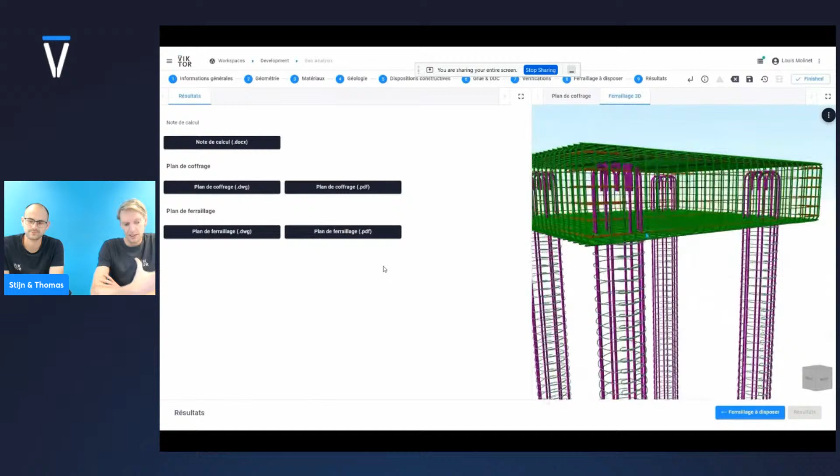To show what's possible, we have a nice example, this use case developed by Vinci, a French contractor. So you'll also see some French in the interface - that's also what we support, multiple languages. What you can see here is an app to design a foundation. It's a relatively simple structure, but the whole workflow is automated in one single application, with all the input parameters for both geotechnical and structural analysis.

All the drawings are automatically generated, and the reports are automatically generated based on all the input. Because of that, what normally would take weeks to design such a structure, they were able to bring back to - minutes is maybe a bit exaggerated, but under an hour they can now design such a structure.

Here you really see the power of a platform, that you can make an app where you can connect all these different calculations. I think the thing we're most proud of in this case is that this app was actually developed by an engineer - a structural engineer who developed this app, and he had almost no knowledge of Python when he started, but he was able to develop this app based on all the building blocks we provide.

All right, so that was the general introduction. I don't know if there are already any questions.

We see that there's someone from South Africa. Yes, Etienne, thank you for your comment. That's great. I think it's always nice if people let us know where you're from, so feel free to comment. In general, if you have any questions in between, just leave a comment, and we'll try to answer them as best as possible.

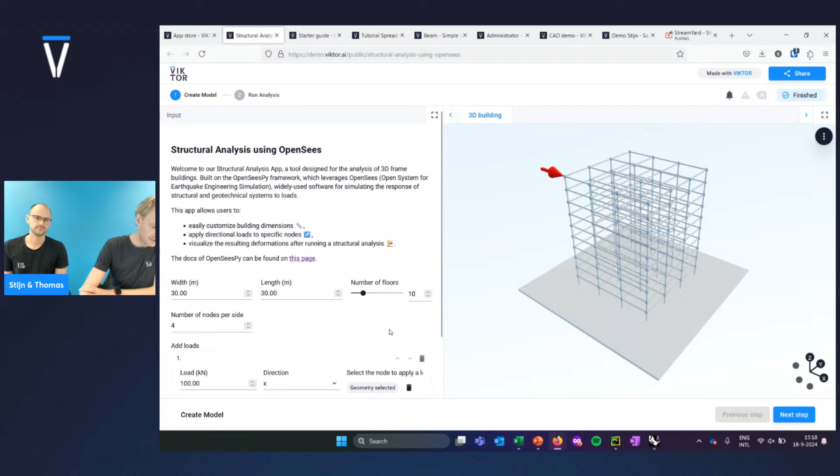To give an example, this is quite a nice app we recently added. What you can see here is that first you can just check out the app, so if you just open the demo, you see this app. This is quite nice to show, also because we added some new features which we presented last time. What you can do here is just have this parametric building, and then you can add some loads, for example.

So I can just click on this geometry, and let's say that I would like to add a load here as well. Maybe I would like to apply it in the Y direction.

And then in the next step, in this case, you can run - we use OpenSees, which is a Python package. So it's not connected to, let's say, a desktop finite element package, but just a Python package for structural analysis. And what you see here is this nicely deformed shape. So this is, you can see, quite a simple app.

So we really see this as a template that you can continue with. If you think this is an interesting app that you'd like to use, you just have a link to the repository, so all the code is just available. You can see here on our GitHub page we have all the code with which you can see how this app is set up.

In the app.py, usually most of the logic is available. And if you then select this template, you can create the app, and basically it immediately creates the app and loads it into your development workspace. Once you go through those steps, you can start adapting the app to your own needs - it's just a few clicks and then it's in your development workspace.

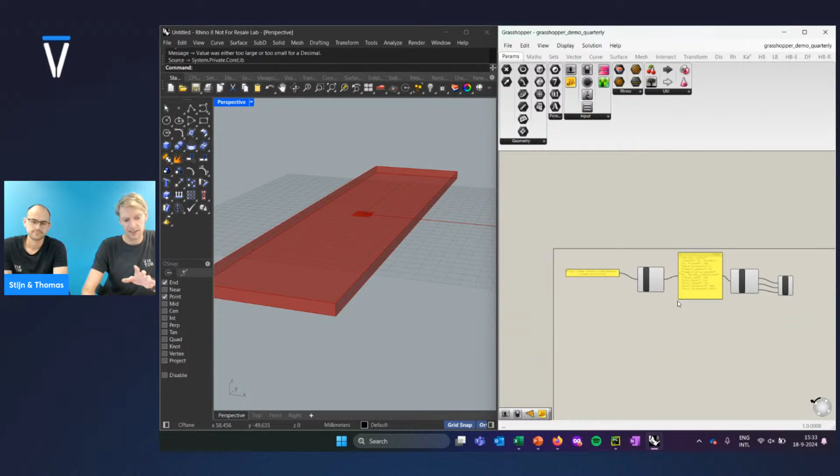However, what we also got questions about is, okay, what about the other way around? What about if from Grasshopper I actually want to call a VIKTOR app? Well, that's what you can see over here. And this is actually also using the API. Shortly, in a few weeks, we will post about this and explain it in more detail. But what you see over here is just a Grasshopper node that we have created.

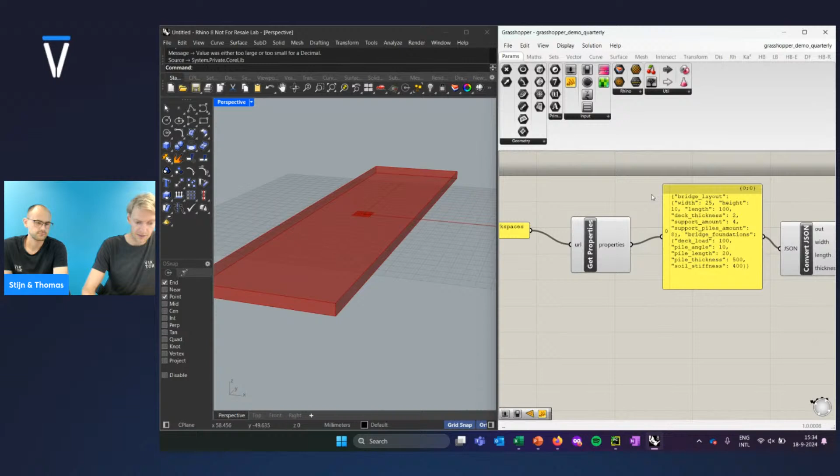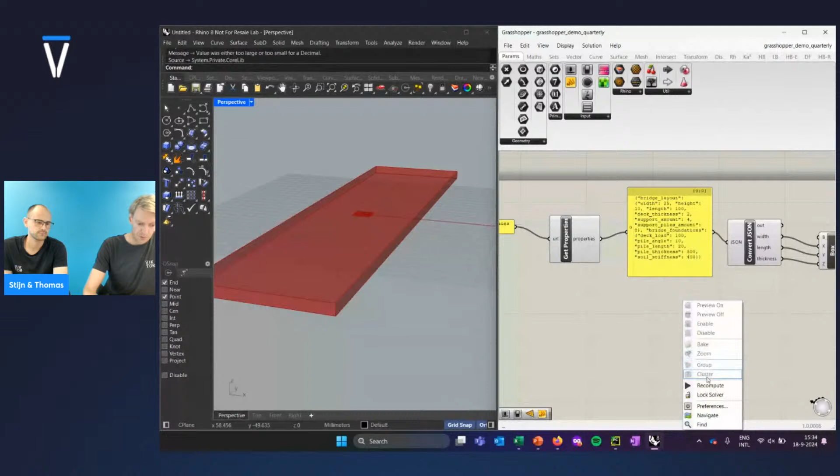In this case it's connected to a specific app, this app. And what you see here is that it basically pulls the data from this entity, so all these parameters are pulled from the app. So when I now change a parameter, you can see here this bridge - let's say I make the deck width 50 meters. I save the parameters, and then when I recompute the model, you immediately see that it fetches the parameter, and based on that - this is a very simple example - it just draws a box.

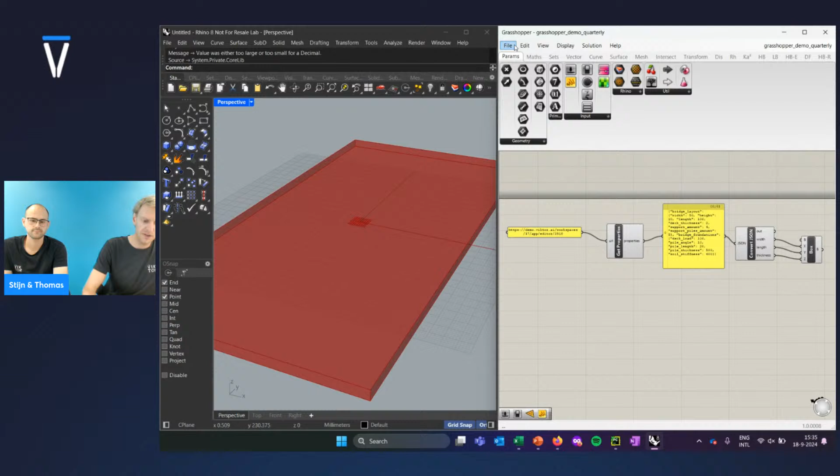But as you can see, you can really easily use this data in your Grasshopper model. This is something that's possible since we have the API available, and this is something we will document and show in more detail. Another really nice example of what you can do with this - and this might be something some people are already thinking about - is, okay, can I also run a calculation? That's the other example.

What you see over here is that I'm using the same beam analysis app that I showed earlier, so that's again this simple beam. And since you can also call the compute event just in a Grasshopper script, what you see over here is basically just the same code I just showed, I use here as well. I have a bit of extra code to save the token you need, because it works basically with an API token.

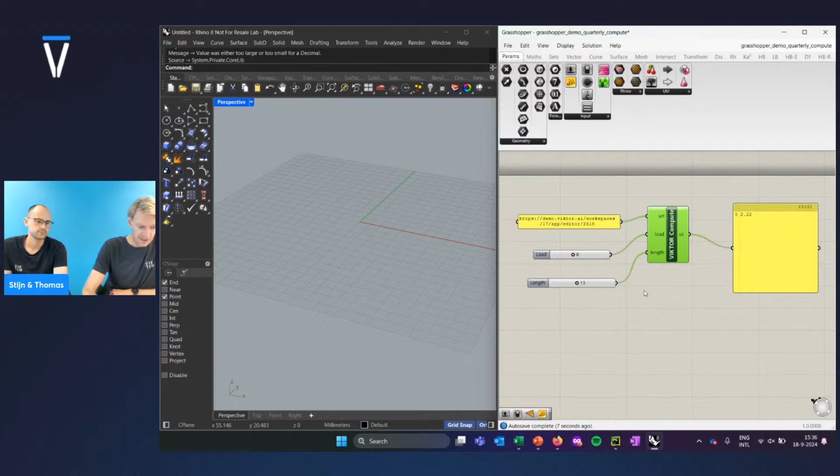And the result is, which I think is really nice, that when you now change a parameter, you can see that it actually runs the VIKTOR code. It changed really rapidly, but it basically just uses this app to calculate the output. It should be the same thing if I also change the load here to 8 and 13. I hard-coded another profile - as you can see here, the result is 2.22, and it's the same result here as well. This is something I think which is really powerful, because in this way you can have quite an extensive app available, and then really easily call it in your Grasshopper model, and also use it in different Grasshopper models while having just one central app available.

Nice, quick question from me. I'm wondering, does this mean that now the Grasshopper user and the VIKTOR app user can be working in the same workflow without both needing to be in the app and both needing to be in Grasshopper?

Yeah, exactly, that's a very good point. That's exactly what we often see with people using these kinds of things. So let's say, for example, an architect is working in Grasshopper to design a building, and what you can then do is push information to VIKTOR, and maybe a structural engineer continues there in the VIKTOR app, and then maybe you pull some information back. So I think there are a lot of workflows possible, but this really enables this kind of hybrid workflow between Grasshopper and VIKTOR. Yeah, very nice.

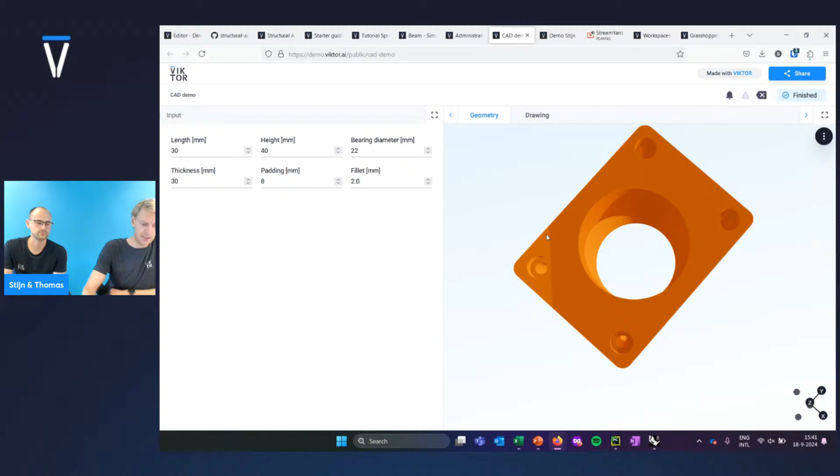In this case, we made an example using CadQuery, a really nice Python package. With this, you can make these kinds of models. What you see here is fully parametric, so if I change a parameter, you'll see it updates, giving a lot of possibilities. This is a simple model, but you can create all kinds of fillets, edges, and the typical things you do in a CAD program.

What's also really nice is that it offers the possibility to generate these kinds of drawings. If I change this parameter, you immediately see these images or drawings being changed. Maybe I chose something that doesn't work... well, as you can see, it automatically updates.

This app is also available in our gallery of template apps. If you go to the templates, you'll see this CadQuery app available, and you can find the code here as well. As you can see, this app code is basically all the code there is to generate this model — very little code, so you can really easily make these kinds of things. That's something I think is very interesting to check out and use.

All right, so that was quite a mouthful, but quite a lot of new information for the viewers.